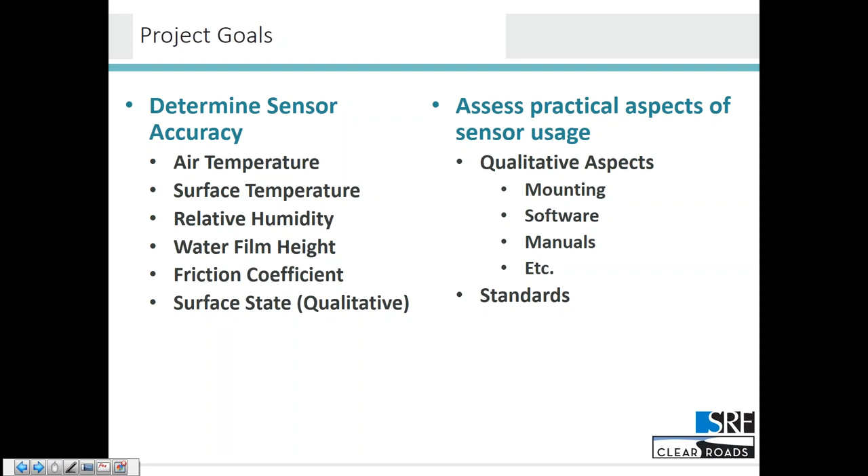The first thing that we did was try and take a look at some of the research literature out there that people have conducted over the years to talk about mobile condition sensing. The first thing we really notice is that the evaluations and research on this is fairly limited. There are only a few sensors that have been evaluated. Generally, these evaluations are lab studies, and they're not real world. You're not taking them into traffic driving on the roadway, and as a result, you see individual evaluations of how well something reports a pavement temperature, an air temperature, et cetera.

When we did find field studies, generally they were talking about friction and the relationship to braking distances and things like that. So they would take out one of these big, like Halliday friction wheel things, pull it around, and then compare that to a sensor.

But they weren't really doing overall evaluations for the quality of the data that the sensor provided. In the few side-by-side comparisons, a lot of the times they were just looking at one. It wasn't a true side-by-side, and that really made it very difficult to compare between studies. You would have a sensor being exposed to a set of conditions at a point in time, but you wouldn't have multiple sensors in the same condition at the same time. And that makes that comparison really, really difficult.

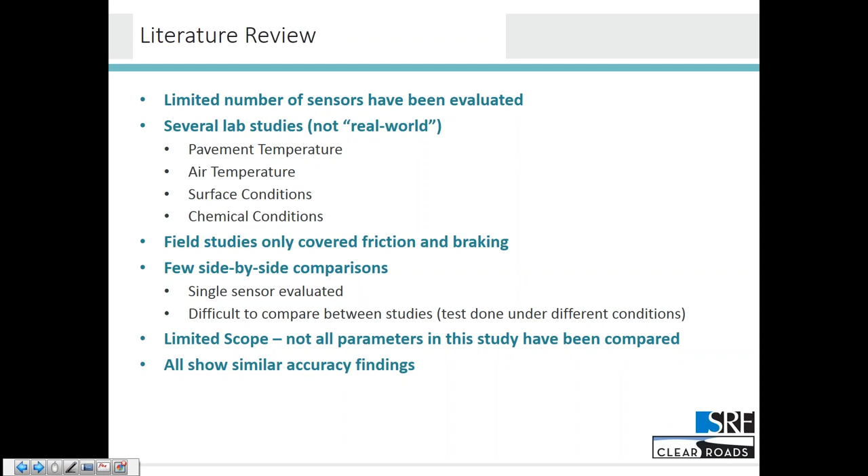And that gave us the background of what we were looking at and what we were going to have to try to accomplish. And we very quickly came to the realization that what we were doing was somewhat new. The format and scope of this project was something that hadn't really been done before. So the next thing we did was take a look at that literature review and go out to do a survey of the Clear Roads states.

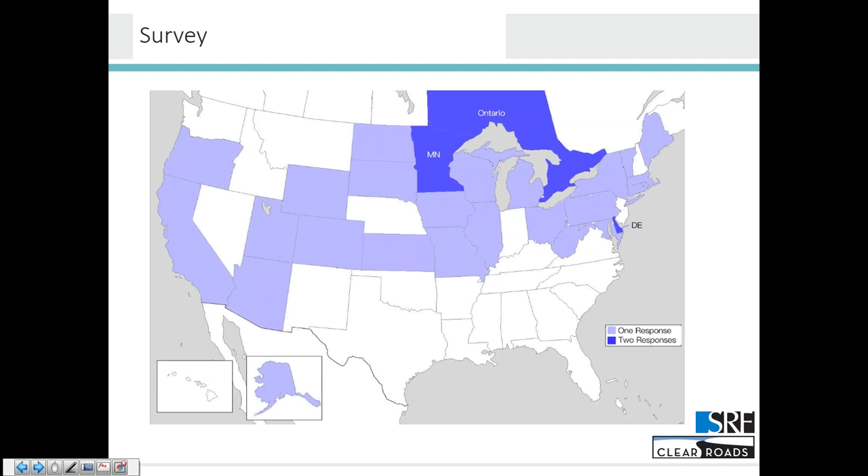Here you can see the folks that responded to the survey. Generally, there was one response per agency in the state, although a few we did get two from different agencies. In particular Ontario, Canada, and Minnesota, because those folks deal with a lot of snow and were more than willing to share what they learned with us. The big results of the survey looked something like this. These were the big takeaways that we found.

First of all, there isn't a lot of mobile sensor use out there. We found 18 states that did them in one form or another, at least one vehicle equipped with at least one sensor type. But we found 19 states were planning to add these sensors. So although it isn't prevalent, it's definitely growing. And 9 of those states plan to add more than 80 sensors to their fleets in the next 3 years.

So clearly there is a trend out there to want to start collecting data in a mobile environment, and that puts studies like this in the forefront of importance because these are becoming more prevalent. You should know a little bit about how they perform. One of the things I mentioned early on as a goal is to start figuring out how people use these in a practical environment. Aside from how do they perform, what do you actually do with them?

And it was interesting. We asked folks, how do you actually attach these to a vehicle? Side mirror was really common, and I'm sure a lot of the folks listening in have seen the little, I think it's RoadWatch sensors and things like that that sort of clamp onto the mirror of a vehicle and give you a pavement and air temperature. But interestingly enough, there were a fair number that used a trailer hitch where it either clamped onto the ball or fit into a trailer hitch receiver.

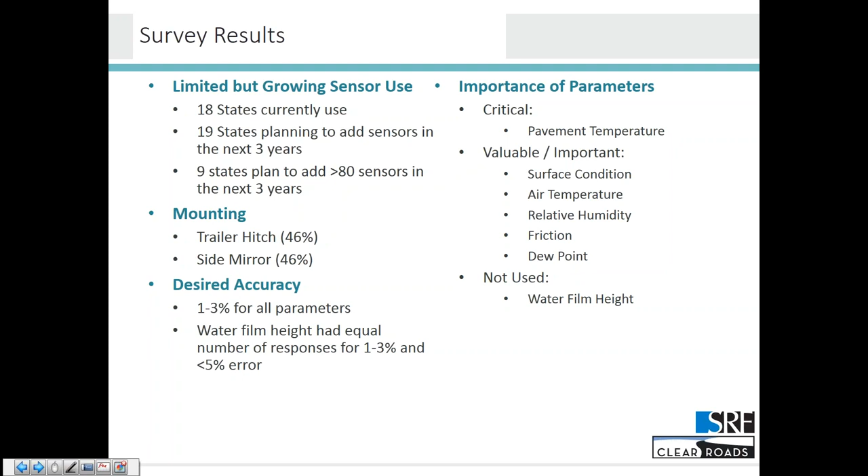So let's talk about the actual sensors. These neat little silhouettes on here are all to scale, so they give you a feel for the relative size of the devices out there. There were 4 sensors that we were able to obtain to evaluate: the Lufft MARWIS unit, the Teconer RCM 411, Vaisala's DSP 310, and the High Sierra IceSight.

All of these, except for the Teconer, have a kind of a dedicated mount. They attach to the vehicle one way or another. The Teconer was unique in that it actually provided an adapter to clamp onto the ball on a trailer hitch. So all of them are roughly the same size. All of them, as you can see for the reported parameters, are roughly the same. But how they mount varies quite a bit depending upon which one you're talking about.

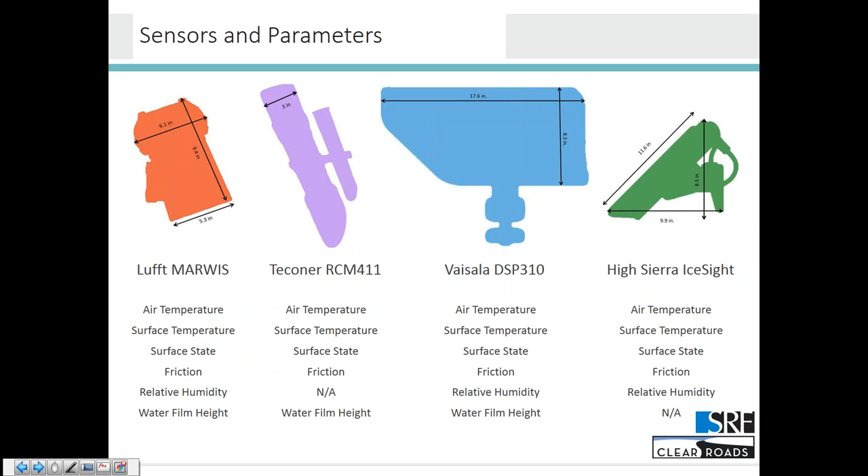In terms of the parameters they report, they were all the same, except the Teconer did not report a relative humidity, and the High Sierra IceSight did not report a water film height. So that's what we looked at. A quick note, the Vaisala was actually a 2-piece unit. There's a separate device that pointed down at the pavement, which is slightly smaller than what you see here. We did have both pieces mounted on the trailer, but these are far and away the largest chunks. And you can see that here.

The test rig is a beautiful example of our handiwork here at SRF. It looks a little bit more kind of rustic than it actually is. As you can see, there's a basic frame which we constructed and cross-braced to make sure that the sensors themselves were stable and didn't vibrate on the trailer itself. We have a large watertight enclosure for the electronics, that big equipment box you see there.

At the very front and back, you can see the 2 Vaisala units. There's one at the extreme rear pointing down and a separate unit up at the front also pointing down. And then the Lufft, Teconer and High Sierra devices in between. We did create these adjustable mounting height devices, and we just called them sleds, but they're really just a 2x4 with some holes in it. But that allowed us to install the sensors at the manufacturer's recommended height all the way around. That's what we maintained for the test. In all cases, we installed at the recommended height, and we used the default calibration for that installation.

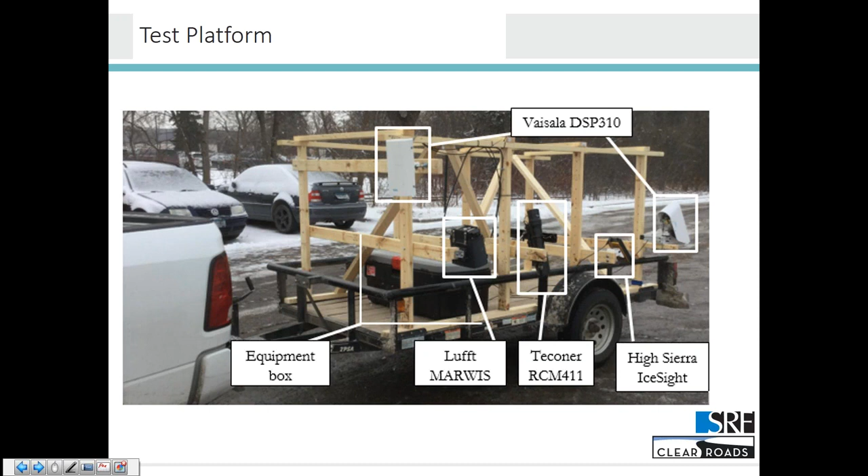And that really gets us into what the user sees. All of the sensors provided software for a user interface. You can see that the Lufft, Teconer, and Vaisala are all bits of software that ran on Android cell phones. In all cases, for those, they connected wirelessly to the device, either through a built-in Wi-Fi hotspot in the device or through a serial over Bluetooth connection. All of these bits of software on the cell phone send data up to a cloud service from which data can be retrieved later.

The outlier here is the High Sierra device. It connected wirelessly as well, but to a laptop computer, and then they provided a Java application that allowed you to see in real time what it was doing. There's also a separate little window that popped up that's not shown here that gives you just a readout of temperature and surface state as well. But this is what you use to kind of see the incoming data and perform calibration, things like that. The High Sierra also provided a physical connection if you chose to use it. I think it was just an RS-232 serial that you could use to connect out.

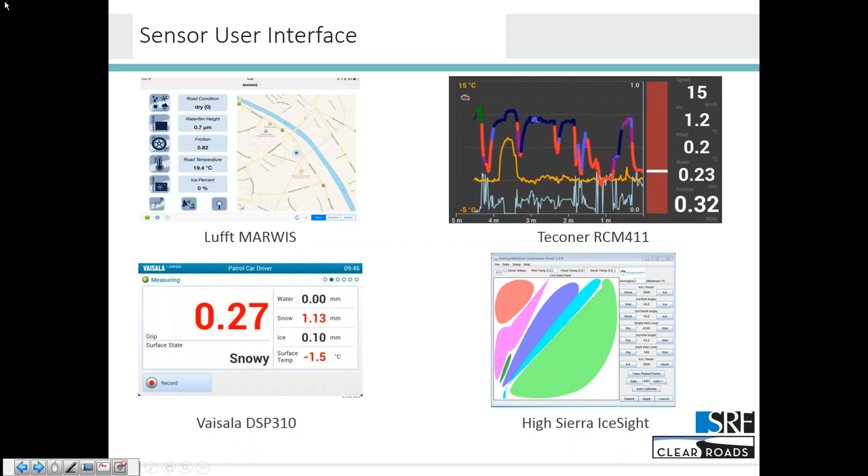So that's the background. That's what we were trying to accomplish, what we found in original research and with the survey respondents, and the devices we were able to obtain and how we actually installed them. All of that, of course, is pretty boring compared to the stuff that's coming up next. Kate is going to talk to us a little bit about how we did the testing for these, and then ultimately what we found for accuracy and interesting bits about the data.

So we were able to drive around on that and stop, get out of the vehicle, take baseline measurements and compare it to what the sensors were reading, which allowed us to hit that first goal, which is to try and determine the accuracy for each of the parameters of the test sensors. The second test was the field testing that we did. And this was in live traffic. We created a route based around our office in the Twin Cities. This is west of Minneapolis, still in the metro area.

This was taken on interstate, state, and local roads to get a variety of different conditions and different speeds. It was about 15 miles total in length and gave us a more practical assessment of what these sensors would look like when you took them out into traffic. However, because we're going through live traffic, we don't have a baseline measurement the same way that we did in that closed track because we couldn't get off in the middle of the freeway and stop and park and take some measurements. For both of these tests, we used cameras, both a front mounted dash cam and a camera pointed to the back in the wheel path to see the conditions while we were driving and get a record to compare our data with.

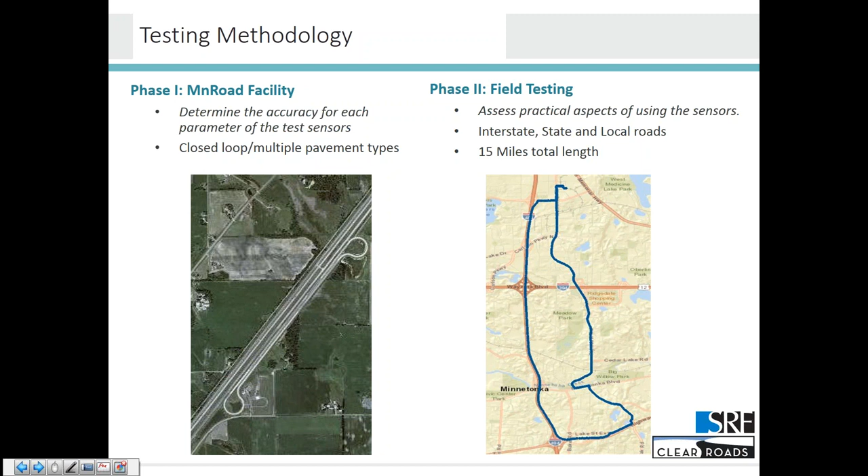So continuing on with the test methodology and those baselines that I mentioned, for the phase one testing, we did a total of 6 runs on the MnROAD facility. We used 2 Omega equipment pieces shown in the bottom there for the air temperature, relative humidity, and the surface temperature, more of the meteorological data pieces. And we also used a wet comb, which was that little metal piece up there, to measure the water film height.

The phase 2 baseline was a little bit trickier because, like I said, we couldn't stop in the middle of traffic. We did 20 runs of this. We did have some baseline measurements that we took from Weather Underground, which is a crowdsourced weather site with very high accuracy, and we used that to get baseline for air temperature and relative humidity to compare it to.

Overall, we had over 90,000 data points that were collected during testing, which took place between December of 2017 and April of 2018. It was a great winter for testing and a bad winter for everything else. We had 5 winter storms and a blizzard. During the test runs, we had a range of temperature between -16 and 57 degrees Fahrenheit. We had a total of almost 63 inches of snowfall, and during that time period, we had 26 days below 0 degrees Fahrenheit. We did this testing in a variety of weather conditions to try and get a broad range of what these sensors would look like in a lot of different scenarios.

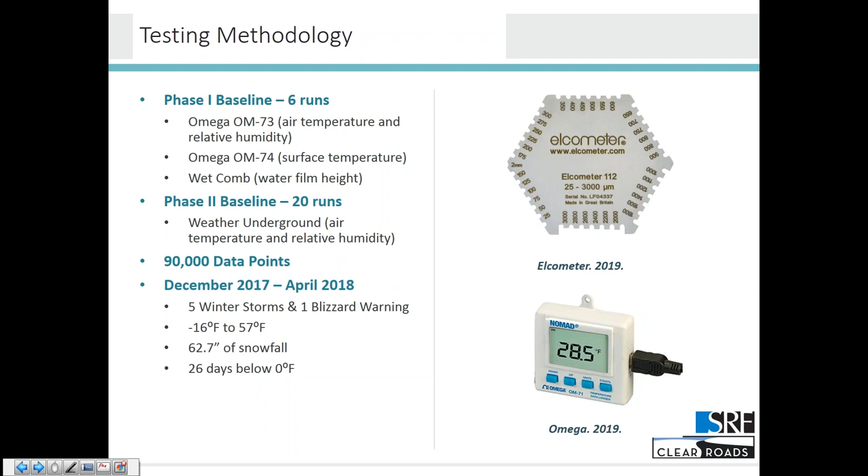So that brings us to the more interesting pieces, the results of this sensor. So starting off with some of that meteorological data, we can go with air temperature. So these slides are going to be broken up between the phase 1 and phase 2 results. The phase 1 on the MnROAD facility was about determining accuracy.

So again, if you remember back to that survey, most respondents were thinking that they wanted about a 1 to 3% error. And sometimes that was never met completely by that 1 to 3%, but keeping in mind that we are typically working with very small numbers. If you're talking about 1 to 2 degrees Fahrenheit, that percent error goes way up.

So overall, the average percent error when we were comparing it with the baseline was 3.8 to 14.6% error, with the lowest percent error being the Lufft device and the highest being the Teconer device. However, that translates to about a 1.4 to a 5.5 degree Fahrenheit difference. So overall, although it's a larger percent, the actual degrees may not be as bad as if you were just looking at that percent.

Then the phase 2, which is focused on comparing these sensors to each other. This is an example of the data that we took during phase 2. So here's a graph of one of the runs that we took. You can see that there's this beginning of this downslope where all of them are kind of sloping downward, going from like 60 degrees to about 10 degrees. And this is because we had our trucks and our vehicles stored in a garage. And as we took it out, all of the sensors needed a bit of time to adjust to the actual outdoor conditions. Typically that took less than 10 minutes.

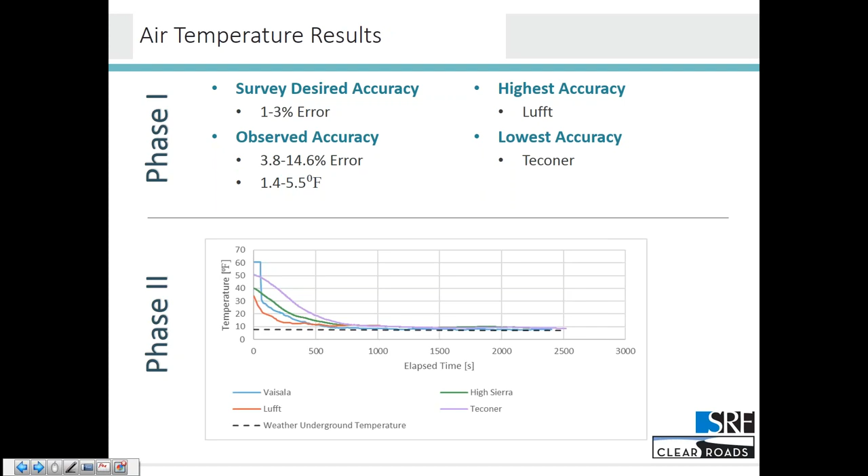So going with the surface temperature, which is, again, another meteorological result, we had similar things to what we found in the air temperature. Again, that desired accuracy was in that 1 to 3% error range, and again, our observed error was much higher than that. Though it only really translates to 2 to 3.8 degrees Fahrenheit difference in error, which is actually, I think, pretty good. The highest accuracy was the Lufft device, which was hitting that average of 2 degrees Fahrenheit error.

However, when we were testing on the MnROAD facility, which had a variety of pavement, Vaisala did perform with better accuracy on the aggregate and asphalt pavements. The lowest accuracy for this ended up being the High Sierra, with the exception of the Teconer on the asphalt.

And you can see too from that phase 2 testing in the real world conditions below, there's a little bit more of a difference in this example, but you can see that where there are hills and valleys in this graph, the sensors generally agree with each other. They might be a few seconds off just based on the placement of the sensors on the trailer, but for the most part, they are in agreement even if the magnitude is slightly different. It also has a little bit of an adjustment period as we're coming out of the garage. You've got that higher temperature that then drops down to much more what you would expect.

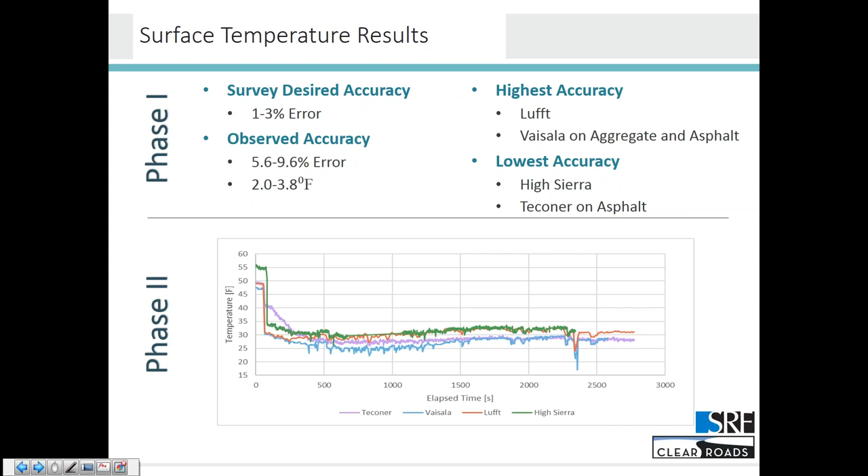So the last meteorological result was the relative humidity. As Mark mentioned up front, Teconer for this study did not have a relative humidity sensor. It was available in an extra package, but it was not made available to us during the testing period, so we're not able to attain it, but you can add it onto the device for an additional price. Again, desired accuracy is still 1 to 3%.

We see a much higher testing percent error in that 9.2 to 15.5% error, with Lufft being the lowest percent error and Vaisala being the highest percent error. And bringing it back to the units, that's a 6.5 to 8.4% relative humidity, not percent error.

And then again, like the other two meteorological pieces of data, we have an adjustment period before they all even out towards that baseline that we had gotten from the Weather Underground humidity. This again took about 10 minutes to even out, but this is pretty typical from one of our test runs where they all make their way up to the baseline, and while they might have some differences, they're generally in agreement with one another.

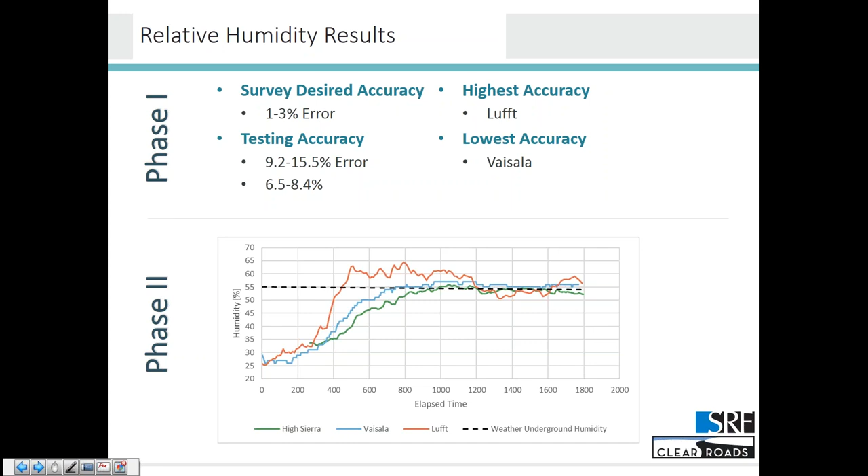So now we get into the results that are a little bit trickier to quantify, starting with the water film height results. As I mentioned in the testing methodology, we used a wet film comb to take this baseline. However, at the MnROAD facility, we were having difficulties using it as we're taking a wet comb on very porous conditions. So all of the water would be too deep within the pore, and you're trying to take the wet comb over a flat surface, it's not going to get any readings.

So we had to change the methodology a little bit from what we had anticipated, and we ended up taking a piece of plexiglass back to the garage, spraying water on it, using the wet comb to see what that water film height was at, and then comparing it to the sensor data. The IceSight machine did not measure the water film height, but the rest of them did.

And this was the value that we saw had the least amount of agencies using and had the more acceptable higher error, that around 5% error. Of course, because we're working with very small numbers, that error is quite high. We're looking at 60 to 373% error, which obviously seems quite alarming. But considering that average error is 0.12 millimeters to 0.2 millimeters, taking it back to that small numbers does make a lot more sense. Vaisala had the smallest percent error, whereas Teconer had the highest error.

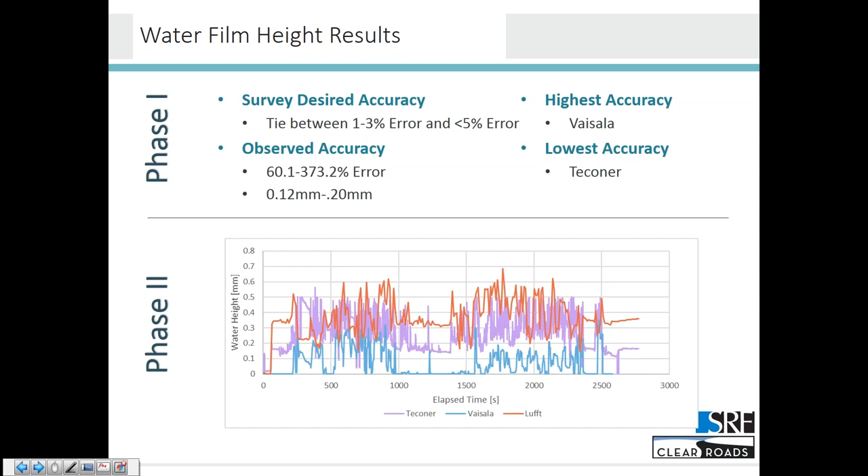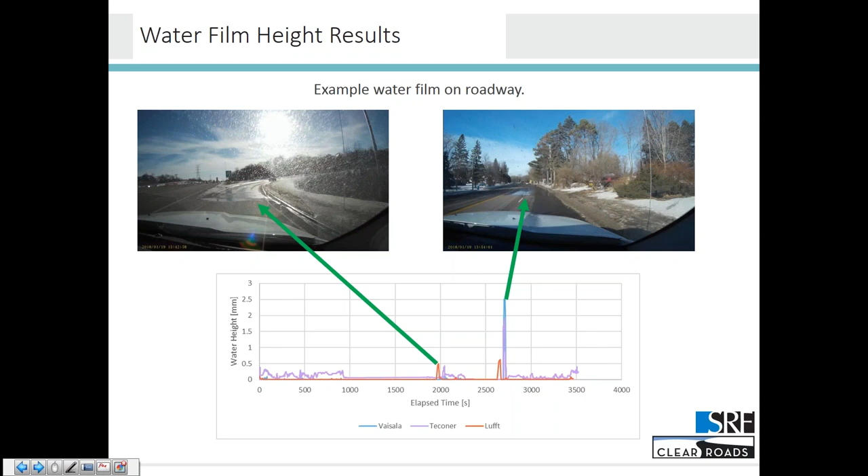So another more difficult option to try and quantify was surface state. And this is very difficult just because descriptions of the surface state are going to be subjective. Wet, dry, damp, ice, snow, these all mean different things to different observers, especially when you're talking about the difference between damp and wet and damp and dry. The amount of water on a roadway that carries it over one threshold is something that's going to be varied from person to person and agency to agency.

So we monitored these states by video runs, and when we were at the MnROAD facility, we would go out and make a physical assessment, touching the pavement, getting a good look at it. However, it's still going to be a personal decision. So our staff assigned a condition to each of these testing facilities and classified it periodically when we were on the MnROAD facility, and then compared that to the observed state from the sensors and the reported state. So obviously it's not going to be as concrete in terms of accuracy, but we were still able to find some interesting results.

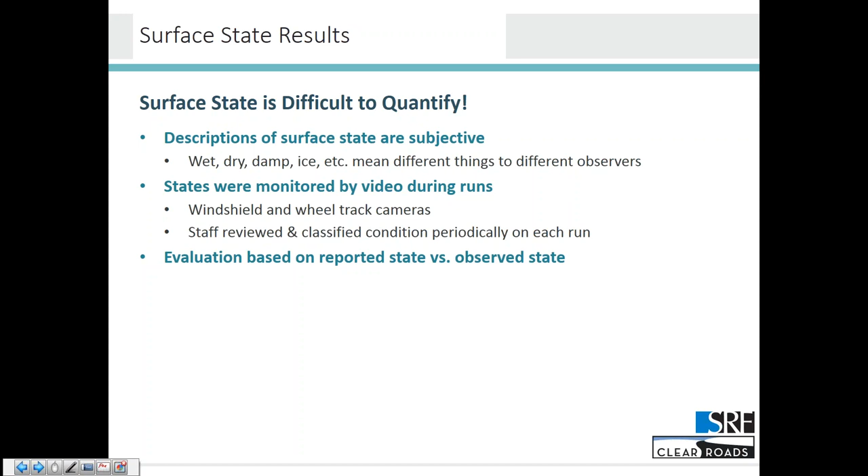The Vaisala and the IceSight allow you to go in and manually adjust the amount of water that it'll classify roadways as damp versus wet and damp versus dry. So if you choose to, you can go in and manually change that. And Teconer and Lufft can't adjust directly, but there are ways that you can make them more or less sensitive, especially if you choose to recalibrate it from the factory sensors.

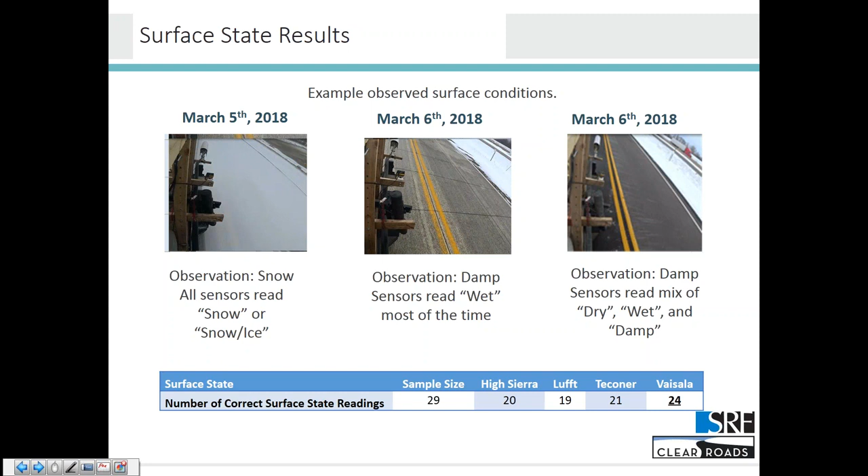So the last parameter that we ended up measuring, and probably the most difficult to quantify, was friction. Unfortunately for this testing, we did not have a baseline. There is not a good way to take friction measurements without some form of intrusive friction reading, and we were not able to obtain that for this reading. So all in all, it ended up being based on comparing the phase 2 results to one another and seeing kind of how sensors looked overall.

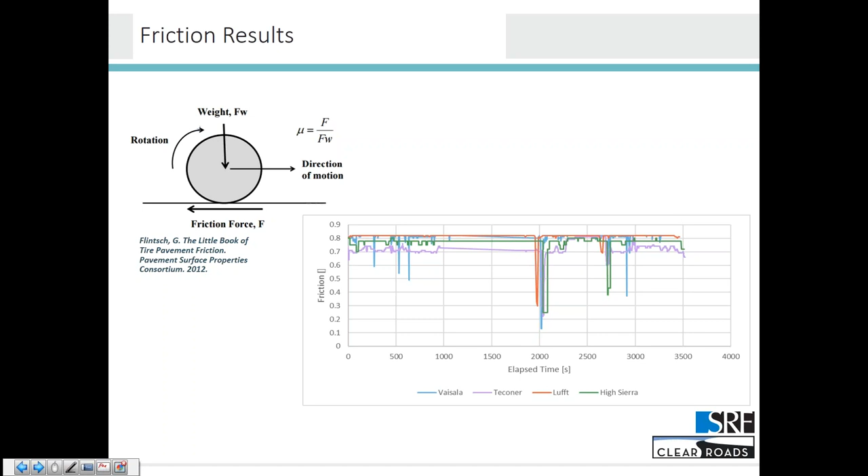So summarizing these results from the phase 1 pieces, we found that typically sensors performed similarly even if the percent error looked very drastic. Air temperature, we only had a difference of about 4 degrees total from the highest average error to the lowest average error, and surface temperature was even closer with less than a 2-degree difference. Relative humidity, again, only about 2% difference, and water film height, only about 0.08 millimeters difference, which is quite small.

Surface state was a little bit more drastic, but again, we have a harder time quantifying that as it's more subjective, a range of 5 out of 29 results incorrect to 10 out of 29 results incorrect. Like we said earlier, friction is not able to compare to a baseline for this project, so we don't know exactly where we line up, though we did find that results generally were similar across the board.

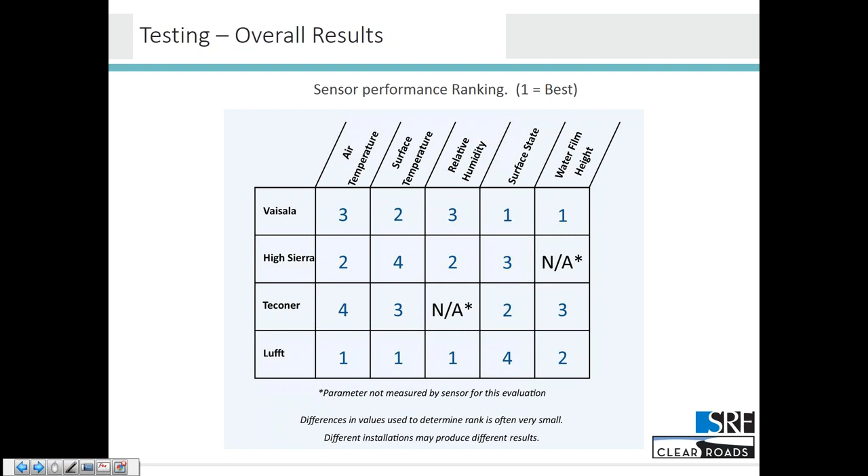So the next big goal was talking about developing standards for how some of these things, oops, my mouse is doing strange things here. There we go. Developing standards for how you describe these conditions. And as soon as we began looking at the documentation from the manufacturer, we noticed a few things. Number one, as Kate mentioned earlier, there's a lack of well-defined terminology. Where does icy begin and slushy, and where does snow begin and ice, and what is damp versus wet, all of those sorts of things.

Those aren't well-defined terms. We also find that when we look at the schemes that have been developed by various agencies out there, everybody's got a little bit different take on how to describe these things and what the underlying measurements to support those descriptions look like. And we found that made it very difficult to translate data, in other words, the numbers that these devices generate, to use that to describe what the road condition is.

And so our goal here was to define a limited set of surface states so that a word meant something. Then to try and define the relationship between a parameter like friction and that state. And then lastly, the ultimate goal would be for ClearRoads to present some recommendations to manufacturers and say that for a given condition, it should look like this and it should report a friction like this. And that ultimately would allow for better data portability between different sensors, and also to be able to compare from agency to agency.

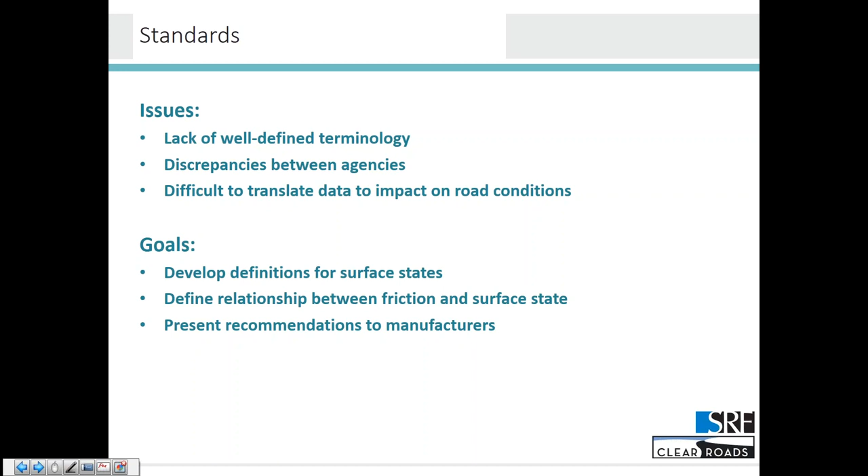We found surface classifications. In some cases, there were 7 or more different surface states that were being described. We had a hard time finding some of them to be completely meaningful, and so we tried to simplify it into things that everybody would immediately recognize. And that's what you see in front of you. We decided that for describing winter conditions, these 4 states made sense: ice on the roadway, a snow-covered roadway, a wet roadway, or a dry roadway. And we think from a traveler information standpoint, those classifications make sense too. They're simple, and those words mean something to the general public.

In terms of defining what those are, ice means that you've got frozen water on the roadway surface with 0.5 millimeter or greater thickness. Your friction coefficient that would correspond to that would be something about 0.2 or less. And that means for the public, those are poor driving conditions.

When you move to snow, you'd have at least 5 millimeters of accumulated and unplowed snow on the roadway. So it's actually coated and obscuring the surface. Corresponding frictions would be from the top level of ice, something around 0.2 to about 0.6, which corresponds to what we observed when we were actually out taking the trailer through the real world roadway tests. Again, these represent poor driving conditions.

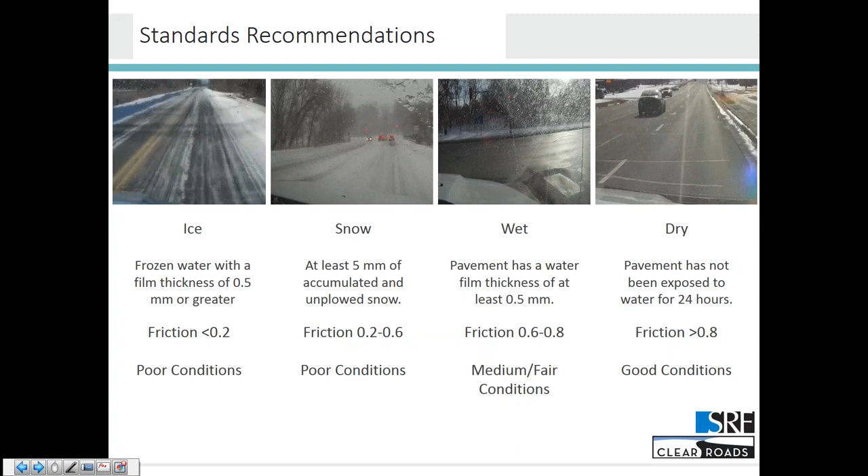So we think that this simplified taxonomy makes sense, both in terms of trying to match some piece of measured data to the description and in terms of describing that roadway to people. We're coming down to it. So the overall conclusions, the takeaways from what we saw in the testing. As we mentioned, this is something a little unique. There are very few side-by-side comparisons of these sensors out there.

Getting a more comprehensive handle on relative performance is important because we're seeing sensor use is increasing. There aren't a lot of states with a lot of sensors right now, but the number of states using them is increasing, and the number of sensors deployed by each appears to be increasing too. When we asked, most agencies were looking for a percent error of somewhere between 1% and 3%. No sensors were found to meet this, but at the same time, we don't know what the rationale is for that 1-3% either. It may have just been a standard reaction to how accurate you want any piece of data. There could be something deeper there, but we don't know where that number comes from and whether or not that actually has to be met for data to be useful.

The big takeaway, again, from the testing is all the sensors perform in a similar fashion for air, surface and humidity. When you get into more variable accuracies is when you get into things where you're not touching it directly to measure it. So things like friction, water film height, and surface condition, you're basically trying to judge what they are by looking at the pavement. And that, I think, is going to limit the accuracy of these over time, just because of the nature of what you're trying to do. Again, in no case did we find a best sensor that was just the best at everything. Different sensors were better or worse in different parameters, but they all, again, performed similarly across all the categories.